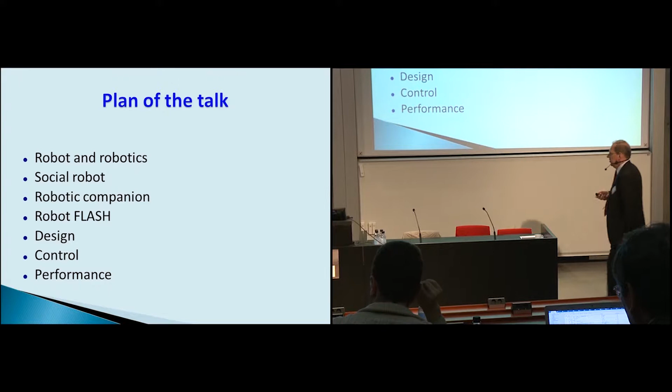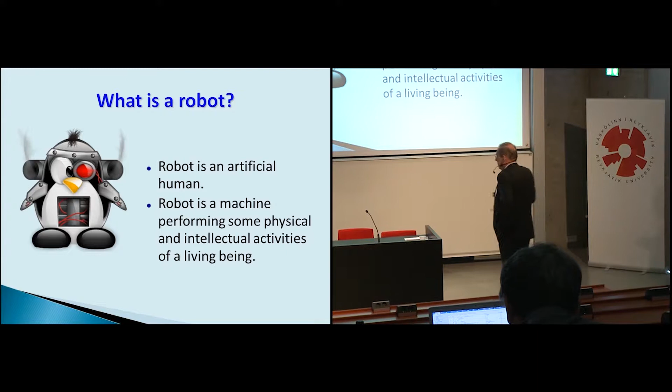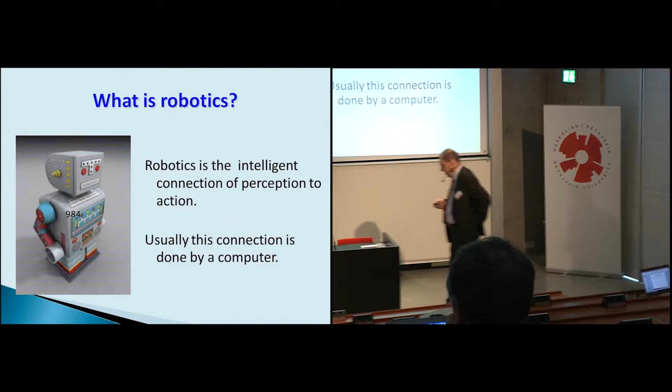As we all know very well, a robot is an artificial human, or it is a device, a machine that is able to perform some physical, but not only physical, also intellectual activities of a human or any living being. More formally, robotics was defined as an intelligent connection of perception to action. This definition comes from Michael Brady, and usually this connection is accomplished by a computer. So robotics is about intelligent connection of perception to action.

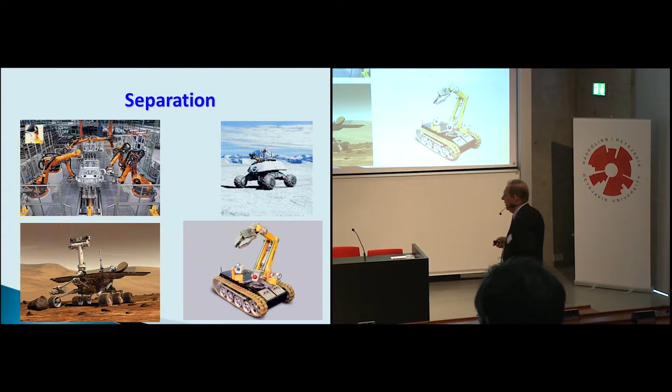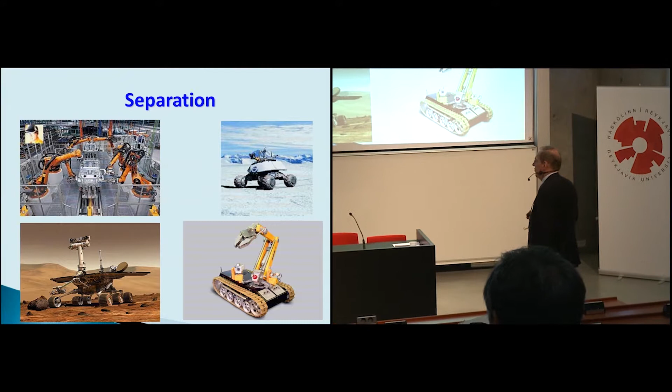Robotics is more or less 50 years old, and I think that at the beginning there was a principle of separation between robots and humans. So, for example, there were some unmanned factories, like this one. This is a car factory without any human around. All the robots were sent far away to a glacier or to Mars, or were used as demining robots. So humans were kept as far as possible from the robots.

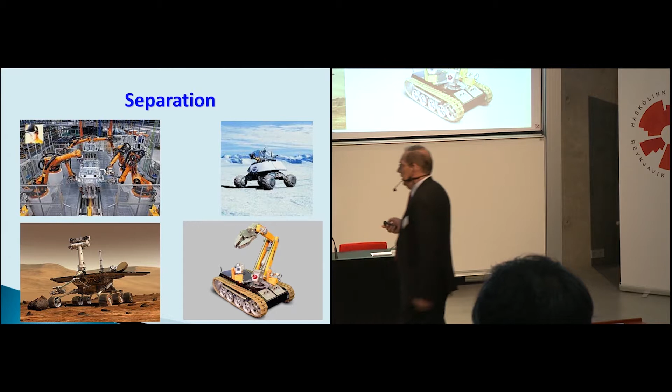But I think since 20 years more or less, things are changing and robots get closer to humans. This first picture was presented already yesterday. You can see the robot NAO playing with children, and this is a Da Vinci robot for surgery operation. Definitely this robot is very close to a human.

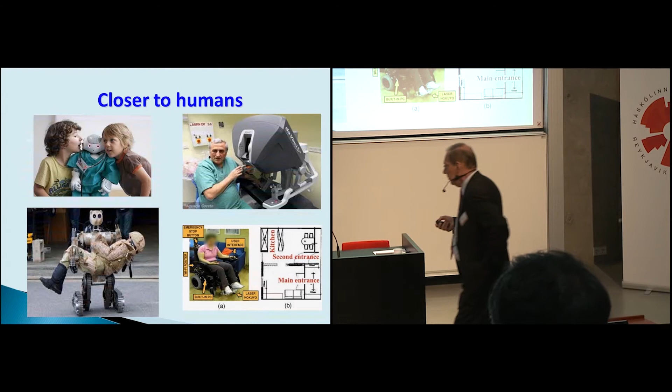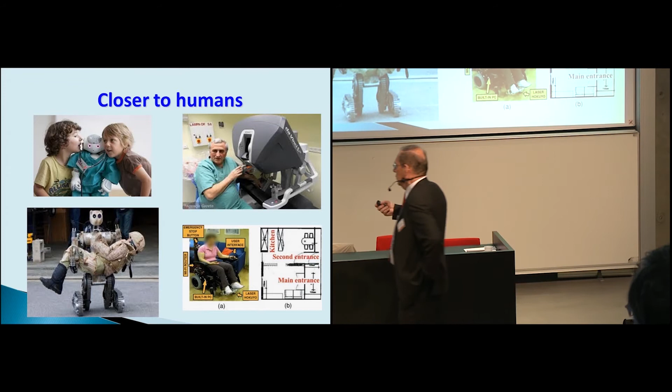Also, this is a rescue robot. And another example, this is a wheelchair designed at the University of Malaga in Spain. All these robots are very close to a human, but the interactions are in one direction. So there is an interaction between the robot and a human, but there are no mutual interactions. It is the interaction in one direction also.

And what more can be expected? What is the next step? This is a social robot. And the social robot...